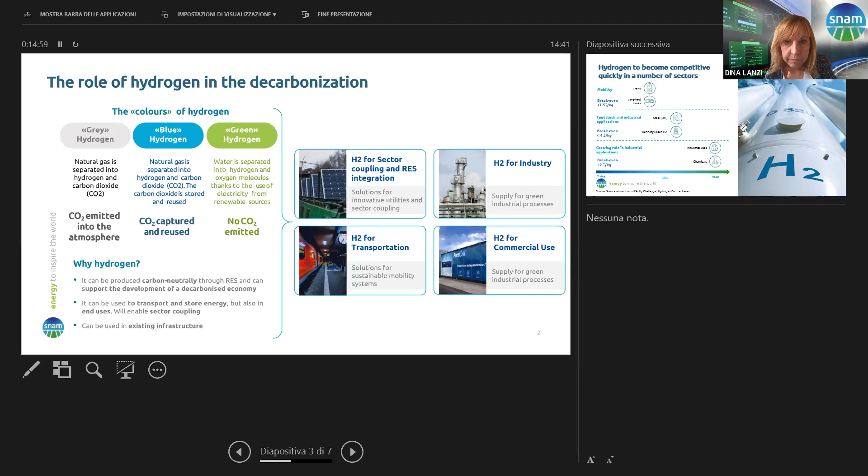And finally, you can use it to self-produce, for example, electricity using a fuel cell powered by hydrogen. For example, in the United States, they are starting to produce energy for data centers in this way. So zero emission energy. Okay.

These are some numbers to make it easier to understand when hydrogen becomes competitive in comparison with other forms of energy. For example, in mobility, the break-even point is less than $7.5 per kilo. So it is maybe the first application we will see, because the economics are more positive in this field with respect to others.

In particular, as I said, in trains, and we already have, for example, in Italy, an application for a hydrogen train close to Brescia. We have the project of the first hydrogen trains. And the second one is the feedstock and industrial applications. So as I said, to feed refineries or chemicals like fertilizer, green ammonia applications. And here you need a price of hydrogen of less than $4 per kilo.

And in the last part, if you arrive below $2 per kilo, then you can also address thermal industrial uses. So you can use hydrogen for thermal applications, like you use natural gas now. For example, in high temperature processes like glass makers or ceramics or, first of all, steel.

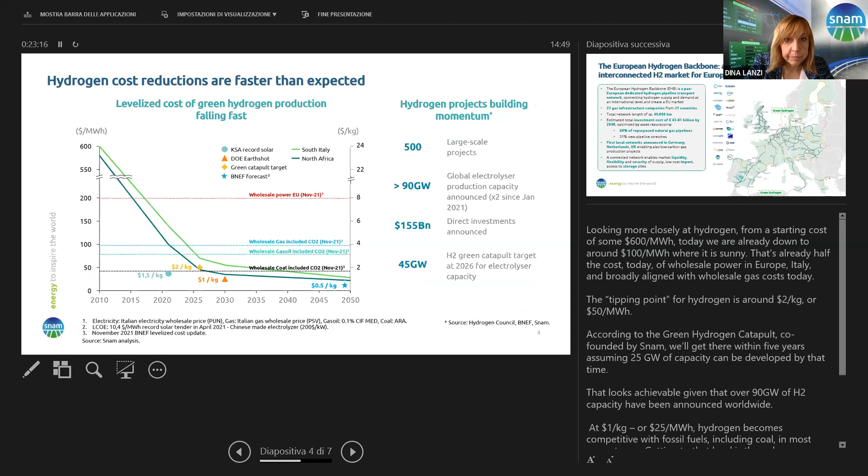On the readiness of the assets, we want to match the activity we are doing in our pipelines with the rest of Europe. So we participate in a consortium of 23 gas infrastructure companies from 21 countries in Europe, to have the first European hydrogen backbone. The idea is to have the first 6,000 kilometers before 2030, and to arrive at 40,000 kilometers in 2050. Most of this pipeline will be repurposed, so the idea is to use mainly the assets we already have for natural gas, and 31% will be new pipelines.

The very competitive price we have with this hydrogen backbone can enable the transport of hydrogen over very long distances, because we calculated a cost of hydrogen transport between 0.1 and 0.2 euros to transport 1 kilo of hydrogen for 1,000 kilometers. So it's a very competitive price.

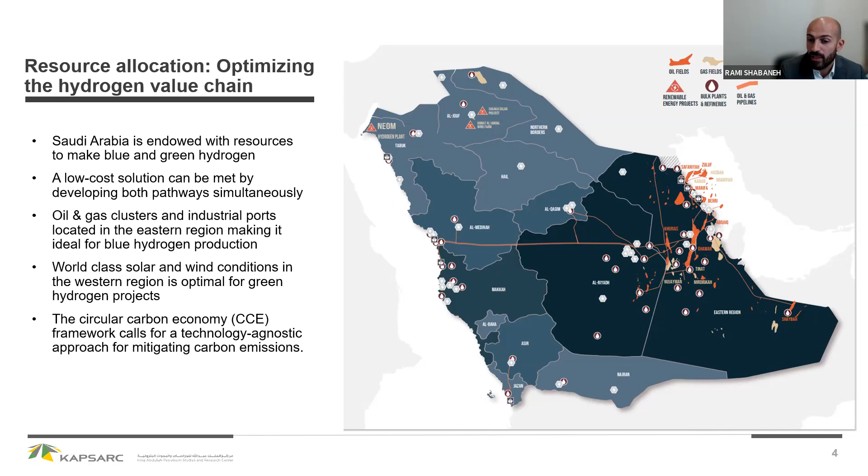And by comparison, the western side is much, much better when it comes to solar and wind resources than the eastern side. And so they really complement each other. And that falls well with the circular carbon economy framework, which is very technology agnostic. It basically says you can go with any technology if it's deemed economic. And that is the approach that Saudi Arabia is taking.

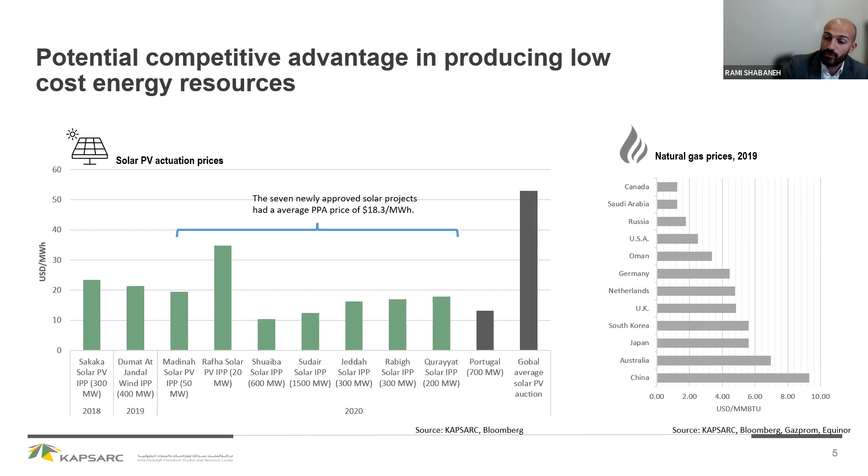On the gas side, yes, Saudi Arabia has a vast amount of natural gas reserves. I think it's ranked 5th or 6th in the world right now after the latest audit. It's important to note, though, that the majority of the gas comes from associated fields. But in the future, a lot of the developments will be in non-associated gas, so the cost will go up. So with blue hydrogen, it's really contingent on the price of gas. But right now, the domestic price of gas is really low, and there's a lot of cushion there for Saudi Arabia to produce blue hydrogen competitively.

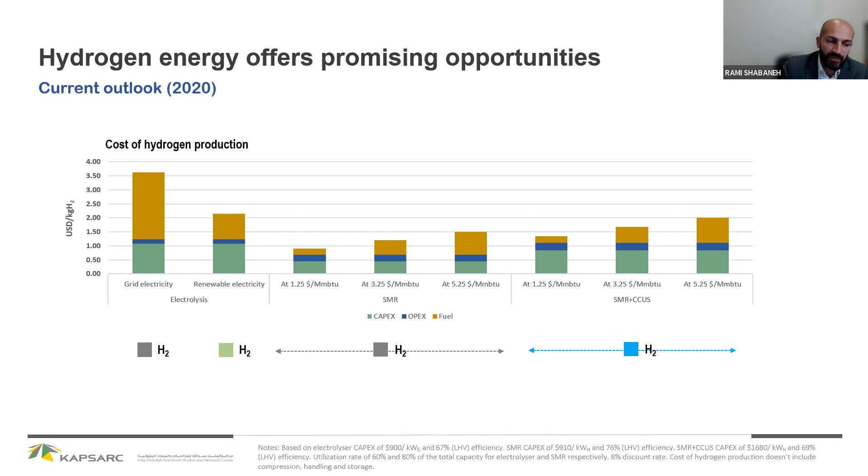So blue, obviously, is more competitive than green. It comes at about $1.34 per kilogram at that same price. But as you can see, we've tested different scenarios, given that if there are price reforms domestically, it will change the price of blue hydrogen. Of course, green is more expensive than blue today in Saudi Arabia, but I'll show you in a later slide that the cost declines there. So currently, if you take the $18 per megawatt hour average price here in the kingdom, that comes to just over $2 per kilogram. But that's still more competitive than, for example, Europe and places in the United States.

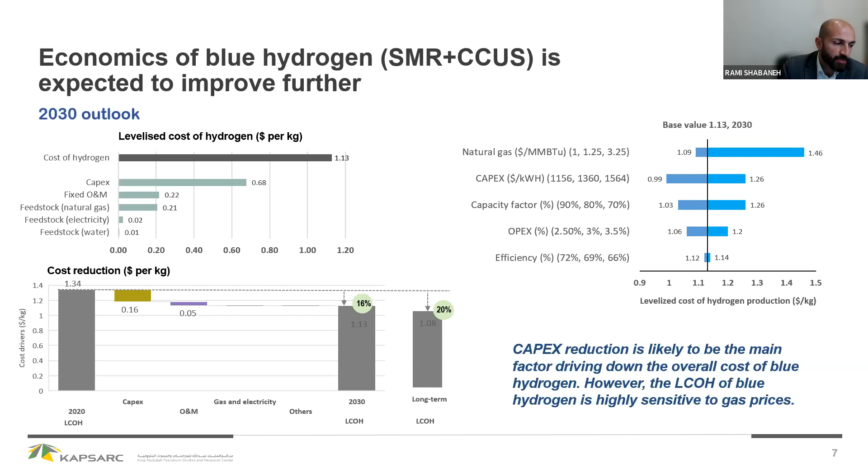And of course, the capacity factor is also important. I have to make a note of that. In NEOM, they are using a PV wind hybrid, because you don't have to only depend on the solar, but also the wind during the night. And there they have thermal winds, really good wind conditions in NEOM. In one of their presentations, they said they could reach capacity factors of 50, even 60%. That's almost like a combined cycle plant for natural gas. So they can get really high capacity factors with the hybrid model, PV and wind. And I think future green electricity projects in Saudi Arabia are going to follow the hybrid model as well.

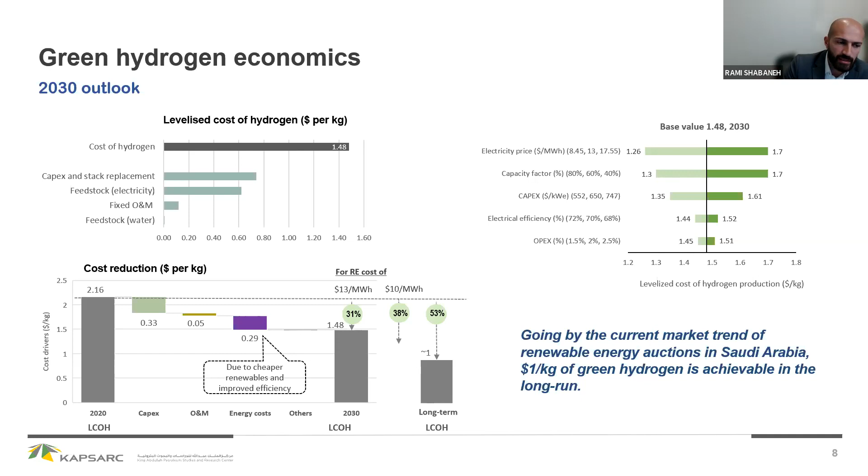So to summarize the cost of the technology both in 2020 and 2030, you can see that green hydrogen sees the biggest drop. However, blue hydrogen remains competitive by 2030 if the price of gas remains constant. But we estimate that if the domestic price of gas goes to $3.25 per MMBTU or higher, you could break even with renewable electricity, and green hydrogen will be more competitive.

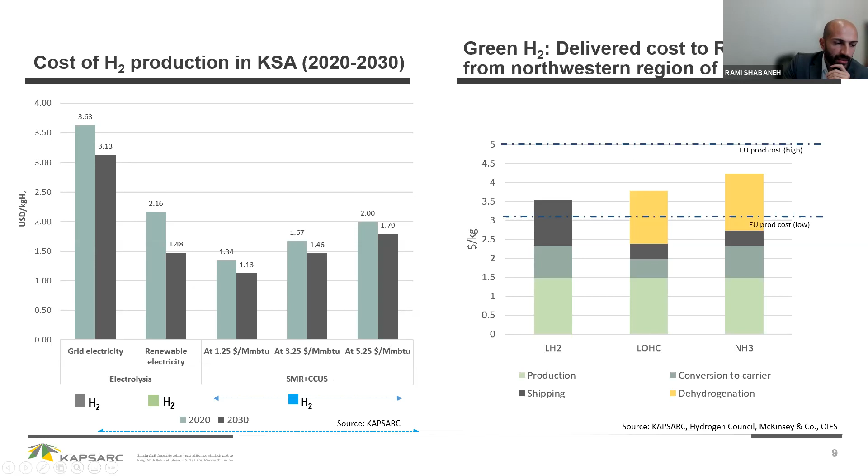But an important thing to note is that the majority of the hydrogen will be transported using ammonia, because this is the easiest and most commercial way to transport it currently. I'm talking about deep sea shipping. And you can tell from that yellow segment of the chart for the ammonia or the LOHC, there's a significant cost of decomposing ammonia back to hydrogen if you want to use pure hydrogen. So that's something to keep in mind, and probably in the long run we really need to scale up liquefied hydrogen production so that it removes that cost of conversion. Currently we're not there yet, but that's something to think about.

Okay. So here, it's just a thought experiment we wanted to do to see, if Saudi Arabia uses 5% or 2% of hydrogen domestically, how much hydrogen demand would that entail? And then how much resources will it pull if you use green only or blue only? If you look at the 5% penetration of hydrogen in final energy demand by 2030, that's estimated to be about 2 million tons of hydrogen per year.

And that will take a lot of renewable energy to create. We estimate it's going to take about 44 gigawatts of renewable electricity just to supply about 5% of your energy demand from hydrogen. So that could put a lot of stress on your resources, on your land, on the cost. And that's why we always promote that blue and green hydrogen can complement each other, as opposed to just focusing on or promoting one technology.

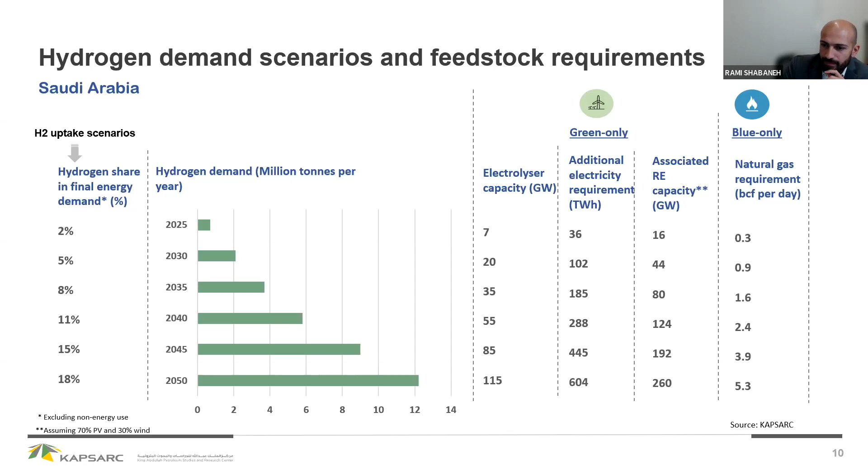So to conclude, like I said, with the abundant renewable energy potential and significant resources, Saudi is well placed to be most competitive, a hub for production and for exports. Like I mentioned in the earlier graph, it's important to take the distribution of resources into the equation, not just focusing on solar or natural gas. Depending on where they're located in your country, the optimal solution could be developing both.

Blue hydrogen, of course, currently has a head start over green hydrogen, but further declines in capex are expected with scale up, and it's important to also understand that they are sensitive to natural gas prices. Green hydrogen, we estimate that it's likely to reach $1.50 by 2030, and even lower if the capex of electrolyzers goes lower than we estimate. For the $1.50, we estimated $650 per kilowatt electrolyzer. If you go down to that $400 range, you can get to that $1 per kilogram.

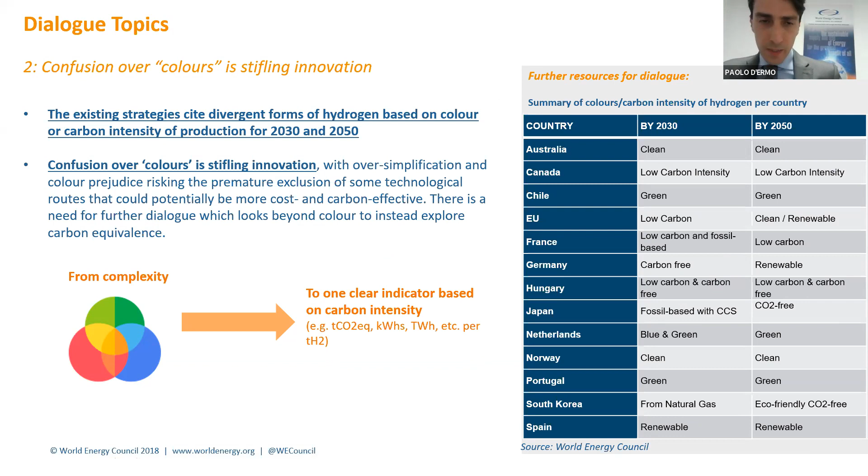Yes. The first issue on which there is wide agreement is that the confusion about color is mounting, because there are a lot of different strategies at national level in different parts of the world, and each one of these is choosing a color. It would be better to choose a clear indicator of what the hydrogen of the future should be, and this could be, for example, decarbonized hydrogen. So we have to think about how to decarbonize the hydrogen driver, more than discuss colors.

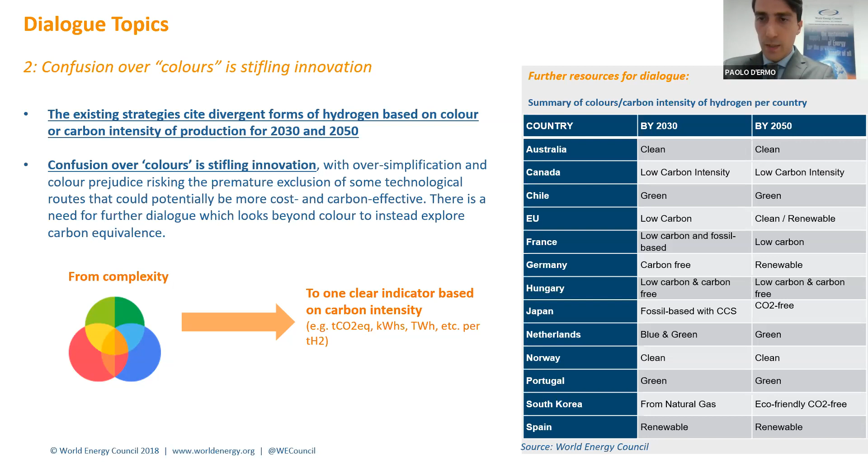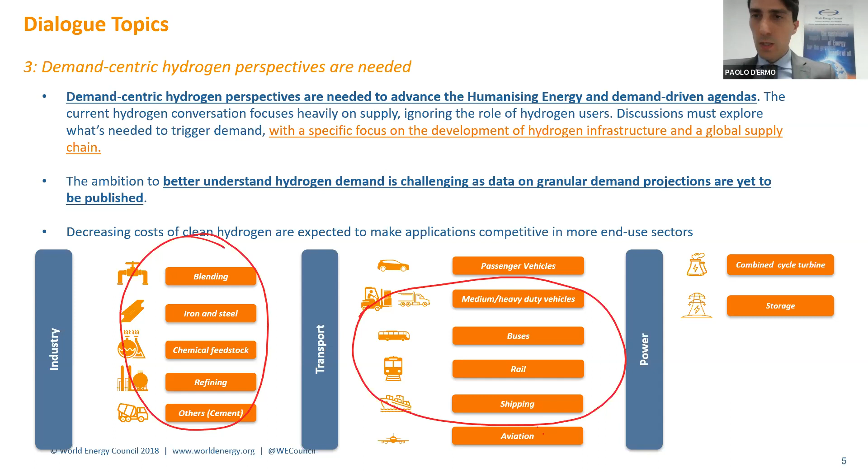Another important topic that we have encountered in many countries is the need to focus on uses more than the way of production of hydrogen. On this point, in Italy, for example, there are important pilot projects that are focusing on the use of hydrogen, not only on the production. So in Italy we are going through these issues to focus not only on the production side, but also on who will be the most suitable user of hydrogen in the next years.

Another very important point that we have discussed with the international stakeholders is the repurposing not only of the infrastructures, but the repurposing of skill inside and within the natural gas sector. This is a very important issue, and in different countries they have highlighted that there is a short-term issue. Because, for example, in order to advance in blending hydrogen inside the existing natural gas network, there are important competencies that can be upgraded and developed from the natural gas sector to the hydrogen sector.

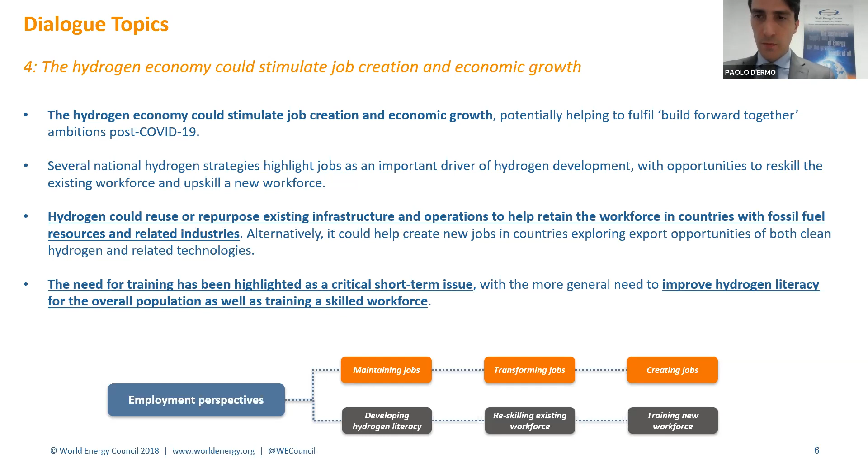Last slide of this first part of the presentation: we have also surveyed different focuses in different regions about the energy strategies. For example, in Asia, if we look at South Korea and Japan, they are targeting more the power sector and transport sector. For example, in Japan, there is an important development in the fleet truck owners association that is running a new strategy to decarbonize the heavy duty transports, and they are looking at gases in general and also LNG and hydrogen and so on.

And we also see that in other parts of the world, for example, in Europe, we have different sensitivities. For example, Spain and Portugal are thinking about hydrogen also as an exporter. We have a stronger focus in the European Union about projects for industry, but also transport is targeted for sure. And again, in Italy, we have examples that we have listed before in first applications or first pilot projects in the heavy industry. In North America, we have also an attention to the blending of hydrogen with the natural gas.

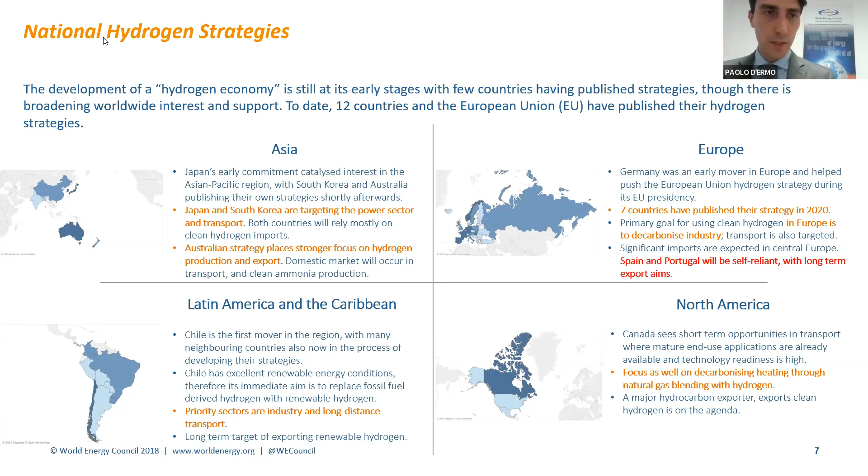So we have different approaches in different parts of the world, and these tell us that as the energy transition, also the hydrogen transition will not be the same in any region, will not be the same in any country. And we also saw the presentation from Saudi Arabia that has a very different approach from the several approaches that we have in Europe. So this is very important to have this view.

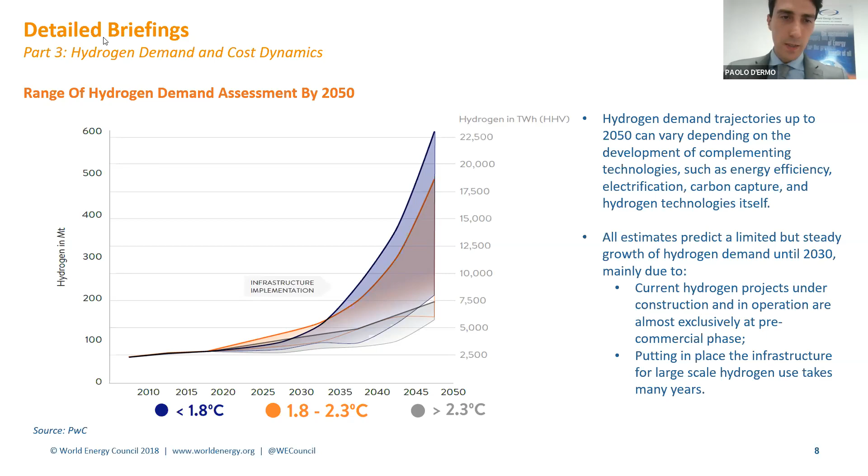What about the second part of this presentation? What about Europe, the European Union? This study, the study that we ran with the AIEE, is the first of a kind because we not only deepened the issue of how much hydrogen Europe will need inside Europe, but also how much import Europe will need by 2050 if it wants to produce and also use those quantities of hydrogen. So we know that in the European Union there is a very important regulatory revision, the third gas package, and we have also read in these days that the third package is moving forward with the integration of gas system, electricity system, and also hydrogen system. So this is a good evolution.

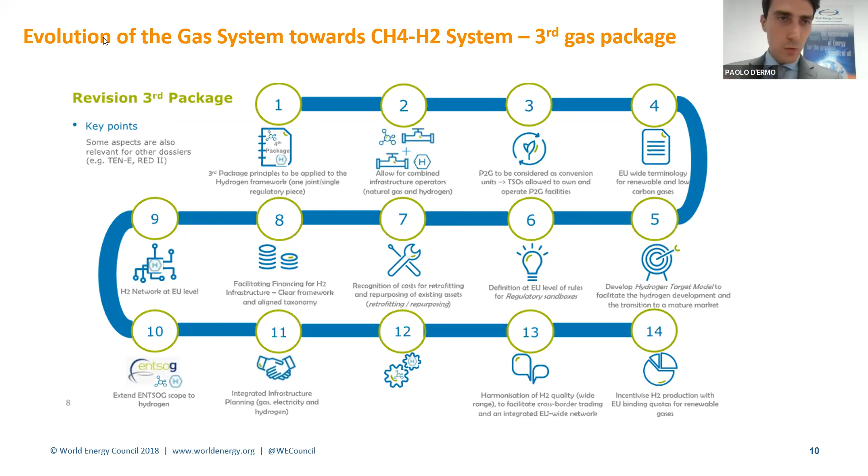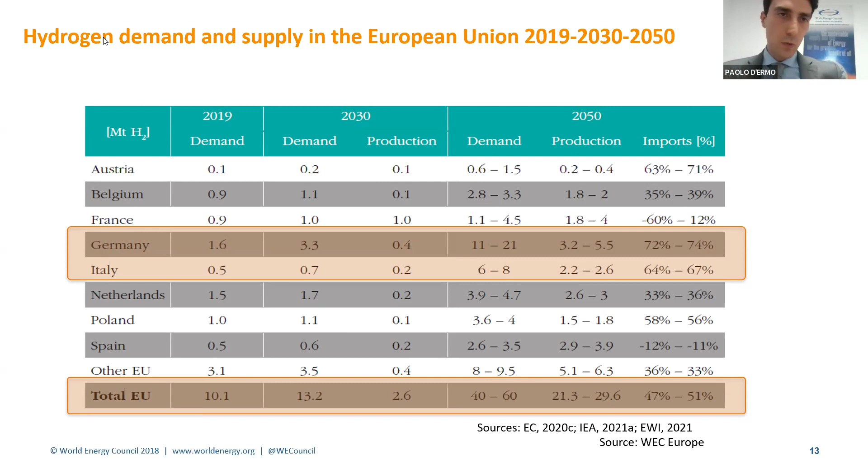And this leads to a very important issue that we also quantified in this slide: the issue of how much capacity has to be installed as renewable energies in order to supply green hydrogen, so hydrogen from electrolysis, in addition to the other quantities of hydrogen that will be imported, for example from steam reforming plus CCUS, as we said before. And this chart tells us that there is a huge challenge about additional capacity to be installed in Europe.

We know that the objectives that we have to 2030 and 2050 about renewable energies alone are very challenging. So we have to add another challenge, that is the additional installation of renewable energies for the green hydrogen from electrolysis. So it is very important.

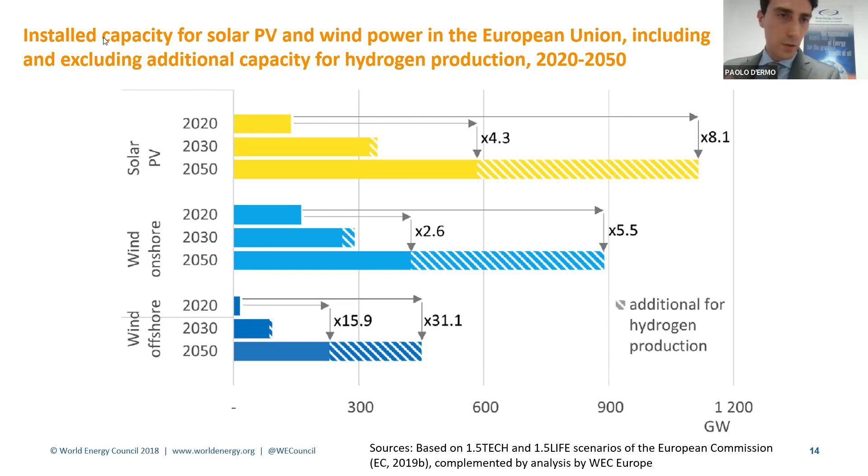I share the point of view of Rami. It is very important that we consider an approach on decarbonized hydrogen without picking specific technologies today, but going forward to consider all the kinds of technologies that can decarbonize more and more hydrogen within 2050.

This is a chart on the cost of hydrogen, and the range that you see here is more or less the range that Professor Bollino first said. We arrive at a range of $3 to $5 per kilogram. This is a projection of what would be the cost of imported decarbonized hydrogen to Europe in 2050. This slide is obviously an evolution of what will be the decreasing cost of the technologies for hydrogen. So we could have a better scenario.

You see that there is a range also when we look at shipping, liquefaction, transmission, distribution. There is a range that we have considered, considering that the evolution of the learning curve of technologies will help to decrease this cost. That said, there is important work to do on decreasing the cost of transport, for example liquefaction, shipping, transmission, distribution. But on transmission and distribution, we are already seeing very important developments, starting from Italy, for example. We have heard before about the provisions for Snam.

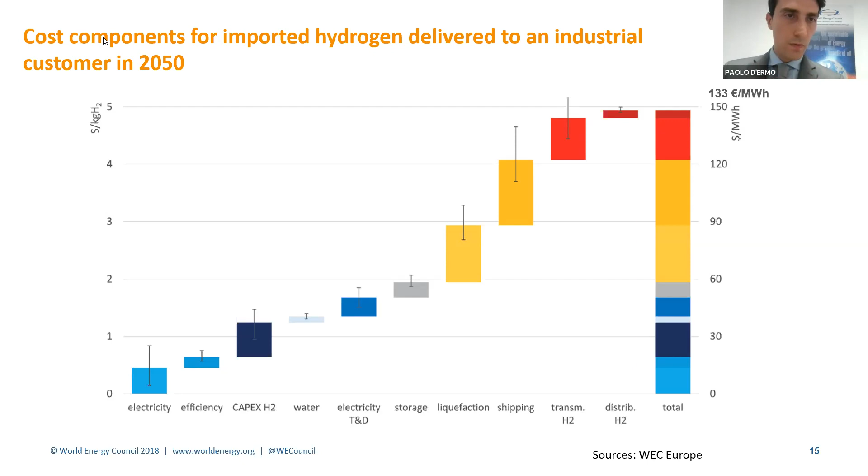This slide tells us what would be the potential hydrogen demand in these scenarios in Europe, and also the kind of hydrogen that could meet the demand that we see in 2050. As you can see, EU green hydrogen from electrolysis will be the biggest share, but it's not enough alone. So there is also a part of imported hydrogen from, for example, blue hydrogen, the one that we heard about before.

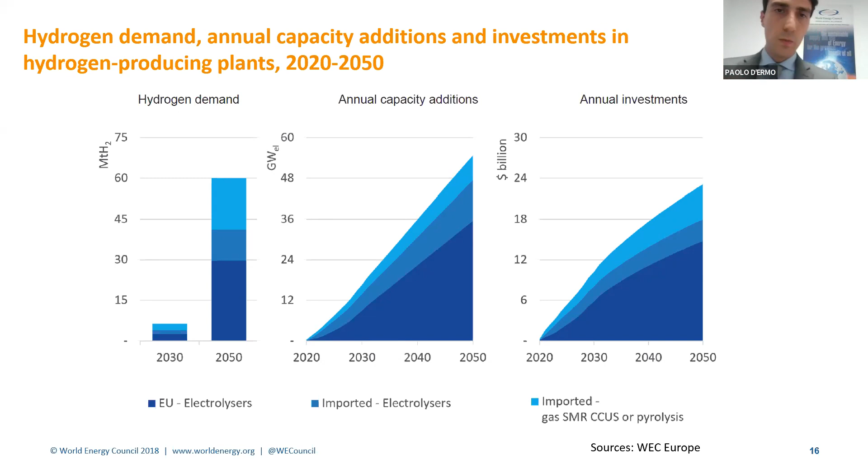And there is also a need for significant annual investments in order to repurpose, modify or develop new infrastructures for the import of hydrogen from outside Europe. And we are more or less in this range.

We have also focused on specific European countries with this study, for example on Italy. I have reported the chart of Italy and also highlighted the numbers of additional capacity needed to arrive at the scenario that we saw before at the European level, and what will be the additional capacity in gigawatts needed in Italy in 2050 for onshore wind and photovoltaic in order to produce the hydrogen we need.

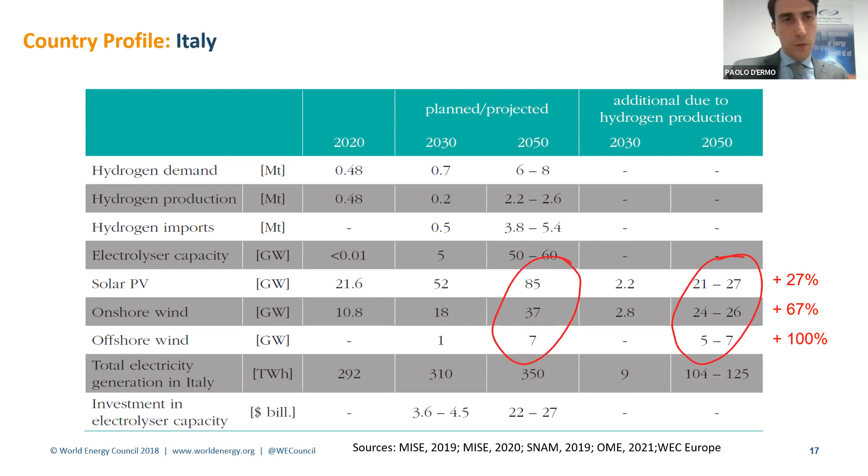And also in this scenario, in which we would have more or less a 27% increase in photovoltaic capacity and 67% in onshore wind capacity, we also have to import several quantities of hydrogen.